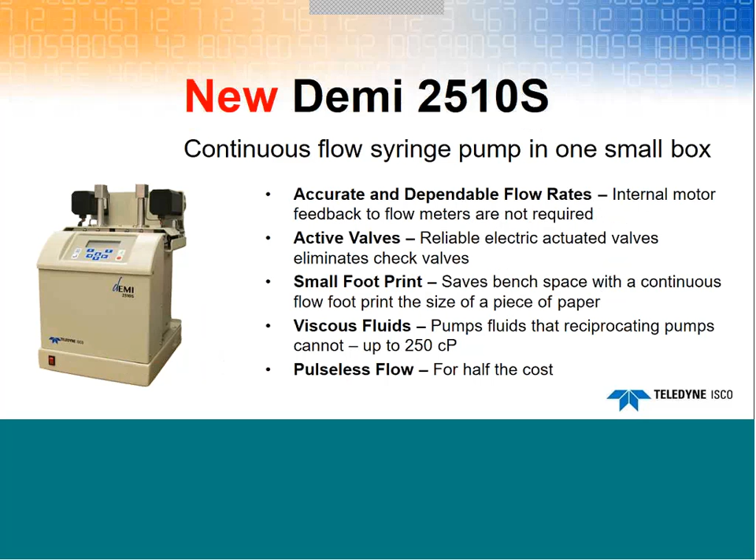The new Demi is a dual piston syringe pump that provides continuous flow in one small box. Its features include an internal motor to give accurate and dependable flow rates without the need for a flow meter, reliable electric actuated valves which eliminate troublesome check valves, a footprint slightly larger than a piece of paper to save bench space, the capability to handle viscous fluids up to 250 centipoise, which is something that a reciprocating pump can't do, and provides pulseless flow for half the cost of other systems.

Chemical reactant feed applications can consist of batch reactors or flow-through reactors, including microreactors. There are many types of pumps used for reactions, but the Teledyne Isco syringe pump, such as the D-series syringe pump, the ReaXus, and now the Demi, are particularly suited for these applications.

The D-series delivers high flow rate accuracies of plus or minus 0.5% for long periods of time, while the Demi provides similar performance at plus or minus 1% accuracy. The ReaXus has many features unavailable in other reciprocating pumps of its class, such as constant pressure, and has a flow rate accuracy of plus or minus 2%.

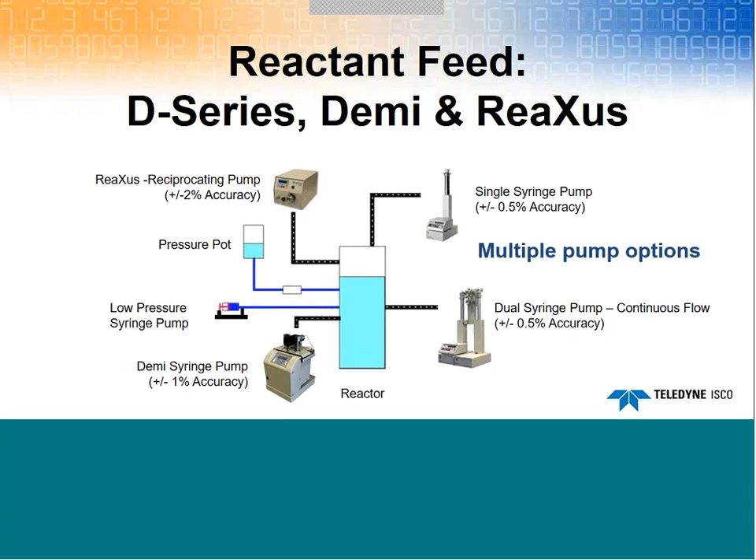Core flooding applications usually consist of a continuous flow system to deliver fluid through a core and a pump operating at constant pressure to provide the overburden or confining pressure. The Demi, combined with the ReaXus, is particularly suited for core flooding training in academic institutions as it provides a low-cost setup. The constant pressure mode of the ReaXus allows for its use to provide the confining pressure while the Demi flows continuously through the core.

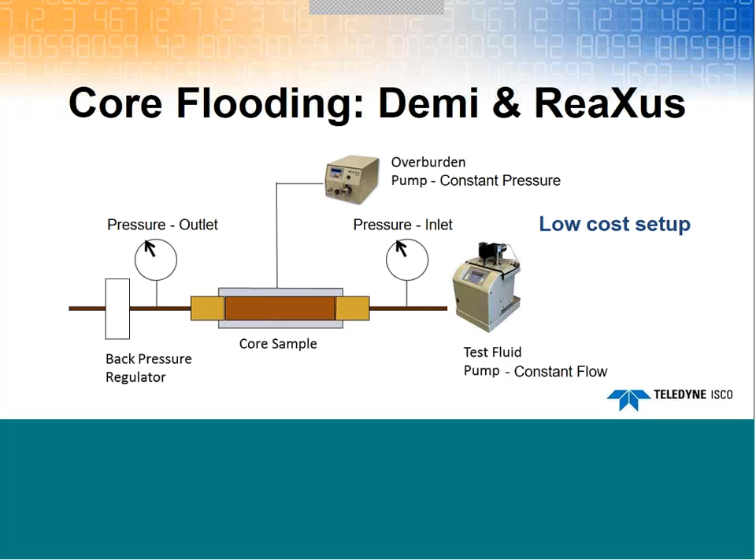Today's presentation will include a discussion on basic specifications - what can it do; setup - how to set up the system and what's required; operation - how to operate the pump and navigate the user interface; external control - what are the options for controlling the pump by external computer; and finally maintenance - how to perform basic maintenance.

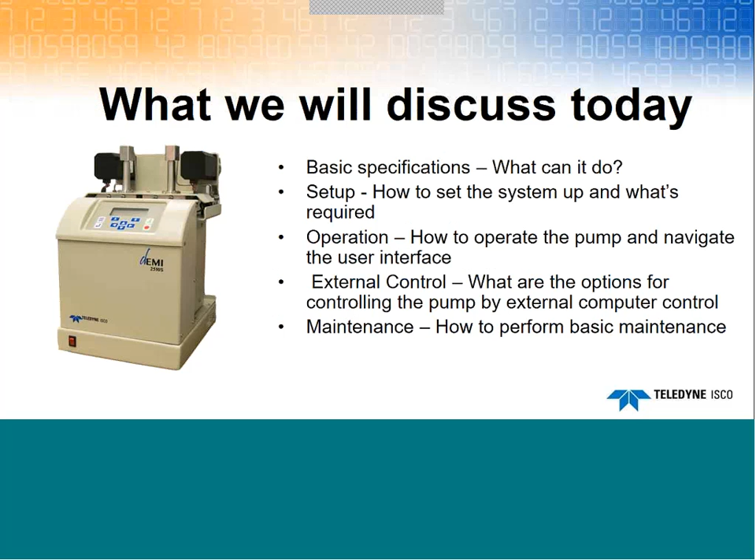The Demi is a pump family name, and the 2510S is the model name. 25 stands for 2,500 psi nominal pressure, 10 stands for 10 mils a minute maximum flow rate, and S stands for syringe pump.

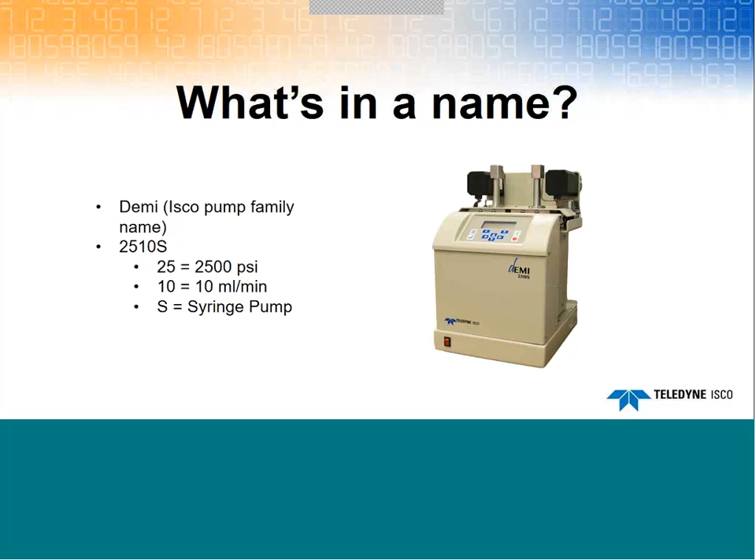The basic specifications are 180 bar pressure, or approximately 2,500 psi. The flow rate ranges from 0.01 to 10 mils a minute, and the flow rate accuracy is plus or minus 1%, ranging from 0.2 to 10 mils a minute. Fluid viscosities up to 250 centipoise can be used. The port sizes for the inlet and outlet are set up for 1/8 inch tubing. The wetted materials are nitronic 50, stainless steel 316, Haynes 214, Hastelloy, PEEK, and Teflon.

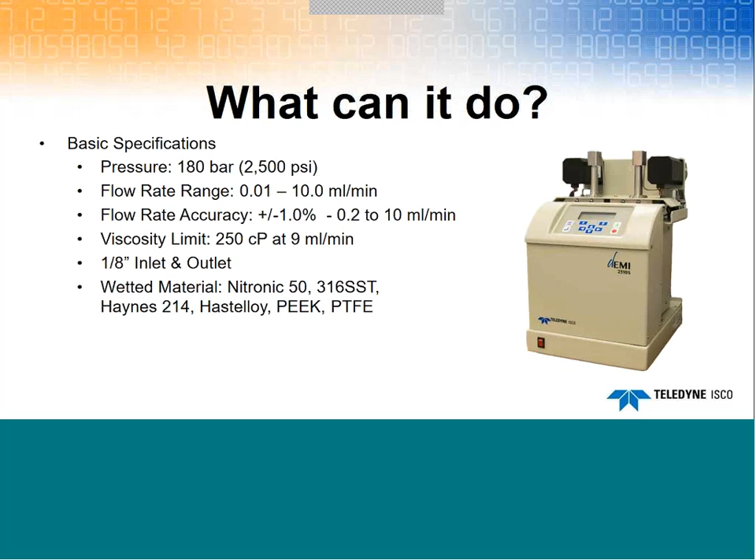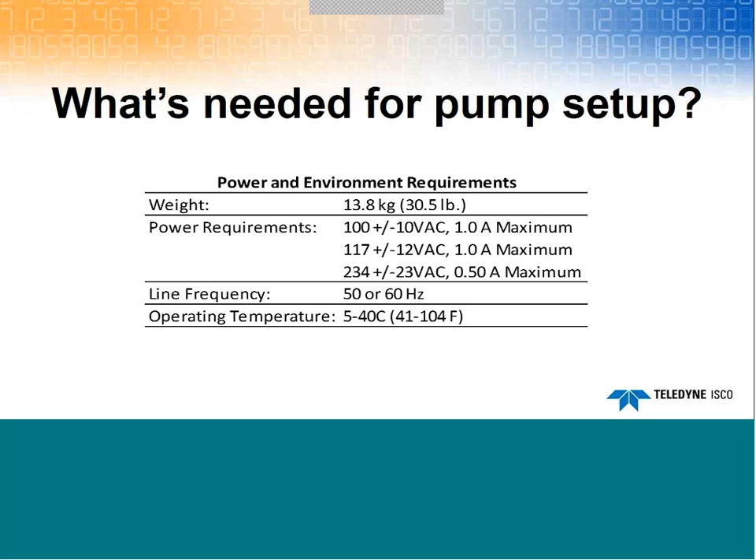The pump weighs 13.8 kilograms or 30.5 pounds, so transporting is no problem. The power can be 100 volt, 117 volt, or 234 volt at 50-60 hertz with only a change in the line cord required for the proper connector. No wiring changes are required for the different voltages. The pump as a whole can operate from 5 to 40 degrees C, which is similar to the D-series pump.

The all-in-one package makes transporting and setup easy. Grip the pump using the handles located on each side for proper handling, but be sure to take the proper precautions and follow the guidelines for lifting 14 kilograms or 30 pounds.

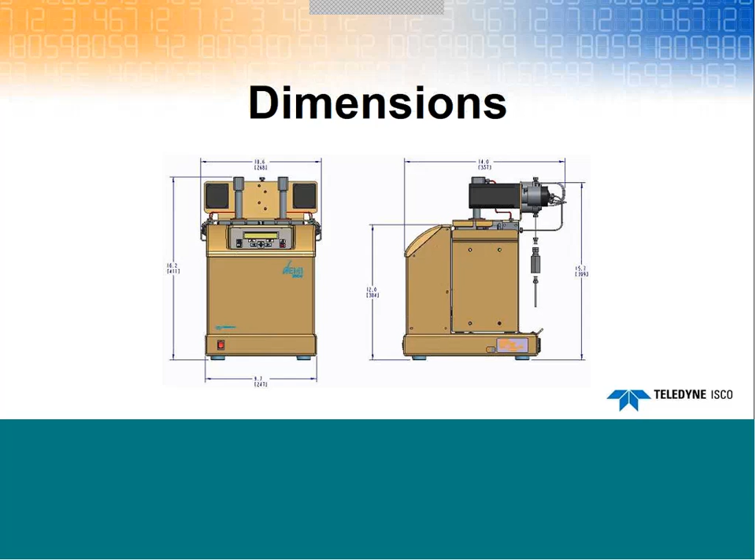The Demi footprint is 9.7 inches or 24.7 centimeters wide by 14.0 inches or 35.7 centimeters deep. Height is just 16.2 inches or 41.1 centimeters. The small footprint means that the Demi can be placed just about anywhere, taking up minimal bench space.

Powering up the Demi just requires installing the detachable line cord as seen here. When doing so, be sure the red power switch located on the front panel is turned off.

The inlet and outlet connections are located at the back of the unit, with the outlet port on top and the lower port as the inlet. Fluid connections use 1/8 inch Valco fittings for 1/8 inch tubing.

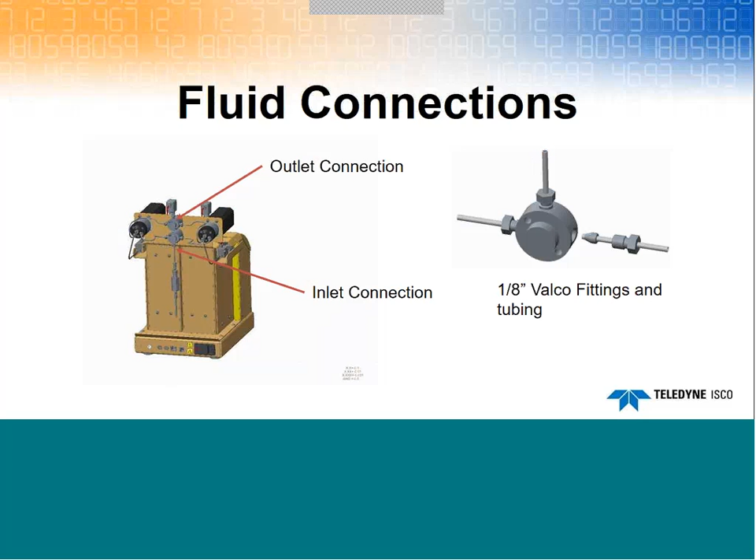The accessory package includes an inlet line complete with filter and Teflon tubing that is installed in the lower inlet port. If all stainless steel tubing is preferred, then just replace the Teflon tubing up to the inline filter with stainless steel tubing.

Your setup is now complete and almost ready to go. Just turn on the red power switch located on the lower left-hand side to boot up the system, and the valves will automatically find their home positions.

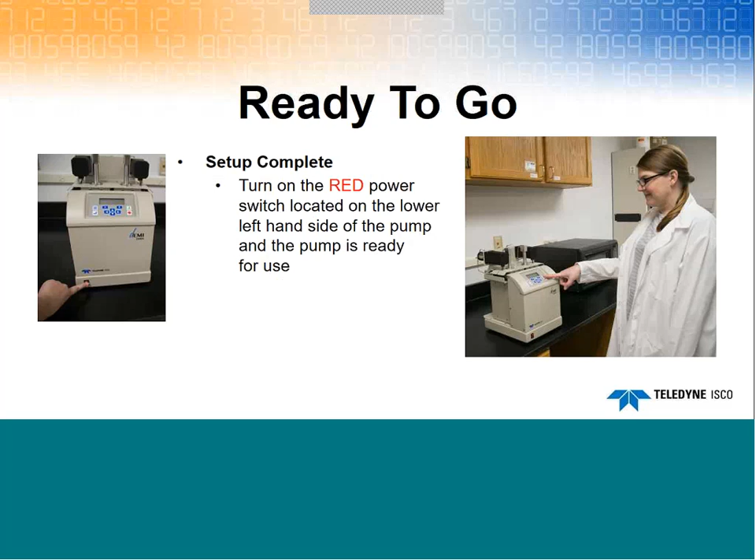The user interface is located on an easy-to-view sloped front panel. I'll describe the key functions starting from the upper left-hand corner of the keypad. Pressing the menu key will access the menu for setup functions.

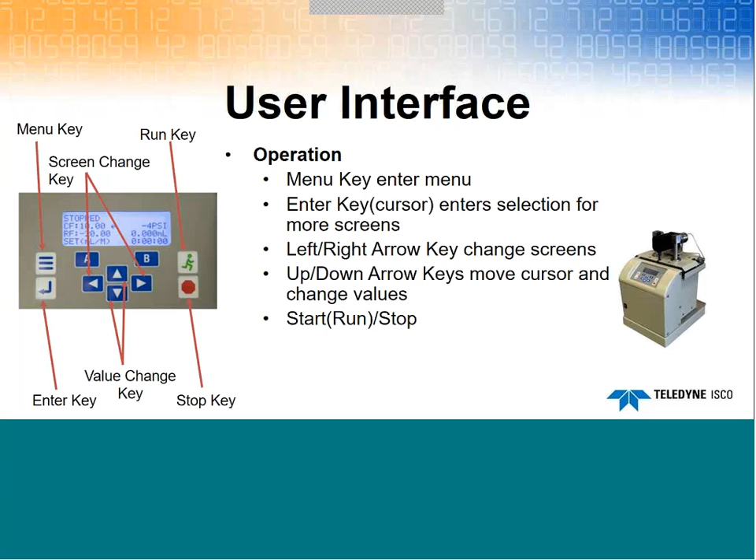Below the menu key is the Enter key, which enters the selection you have made. Next are the left and right arrow keys used for screen changes. The up and down arrow keys move the cursor and change values. Last are the run and stop keys, with the run key shown in green and the stop key in red.

After booting up, the display is backlit and shows the basic operating functions. Starting from the upper left-hand corner and moving down in the first column, the first is the pump status, which shows stopped in this example. Below is the flow rate, which is settable and shown here as 5 mils a minute, which can be set anywhere from 0.1 to 10 mils a minute. CF stands for constant flow mode.

Next is the refill mode, which can be set as high as 20 mils a minute. Under the refill rate are the units, which are user selectable; in this case it shows mils per minute.

Now starting at the top of the right-hand column shows the volume remaining of the cylinder that is currently in operation. Below that is the actual pressure reading, followed by the total run volume. And last is the elapsed time from when the run has started.

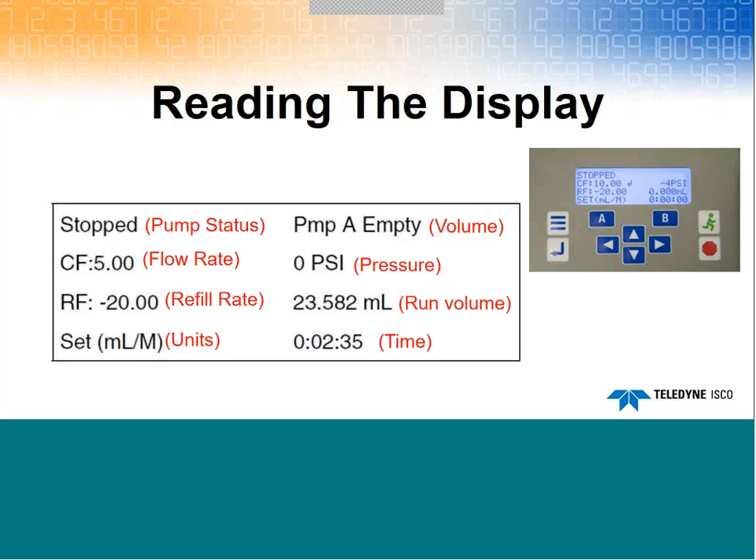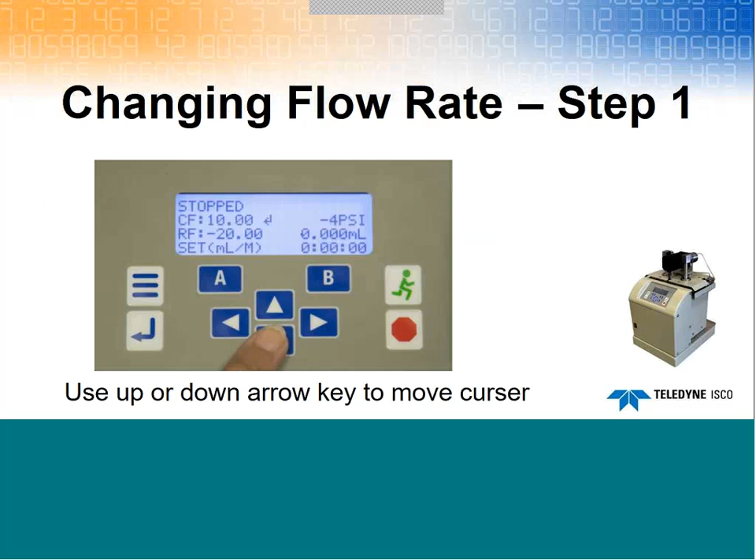Changing the flow rate is easy. Just use the up or down arrow key to locate the cursor next to the CF, or constant flow status, as shown in the picture.

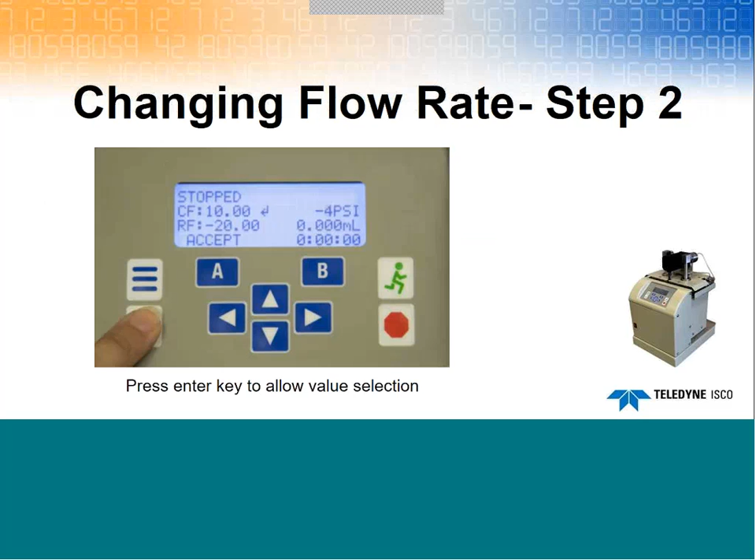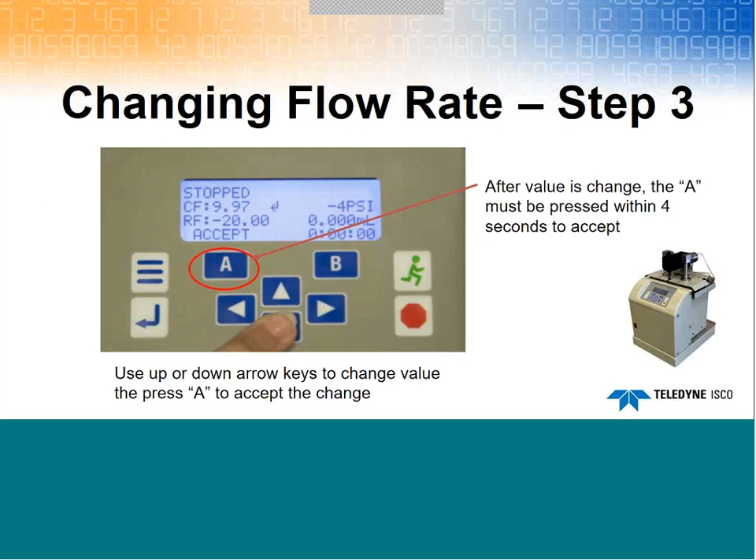Next, press the Enter key as shown. Now use the up or down arrow key to change the value. After reaching the preferred value, press A to enter or accept. The flow rate is now changed.

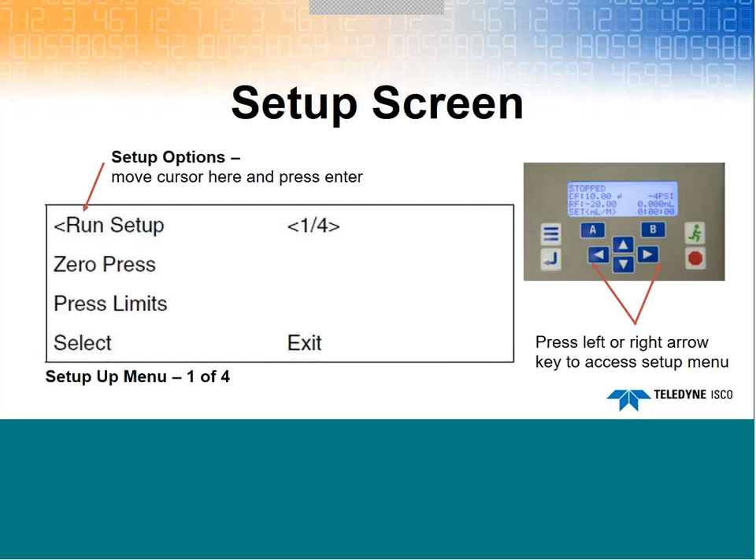To access the setup screen, press the menu key, then use either the left or right arrow key. Scroll until you reach page 1 of 4. When first entering the setup screen, you should already be on page 1. Move the cursor next to Run Setup and press Enter.

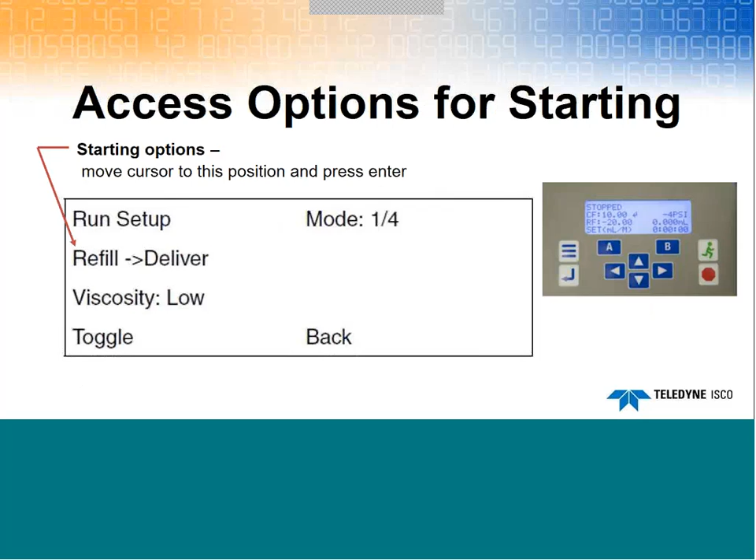To locate the starting options, use the up or down arrow key to move the cursor to the refill deliver position. There are 4 setup options for starting the pump: refill and deliver, empty, refill then deliver, refill only, or empty only. Press key A to toggle to reach the startup option you prefer, then press the B key to return to the previous screen.

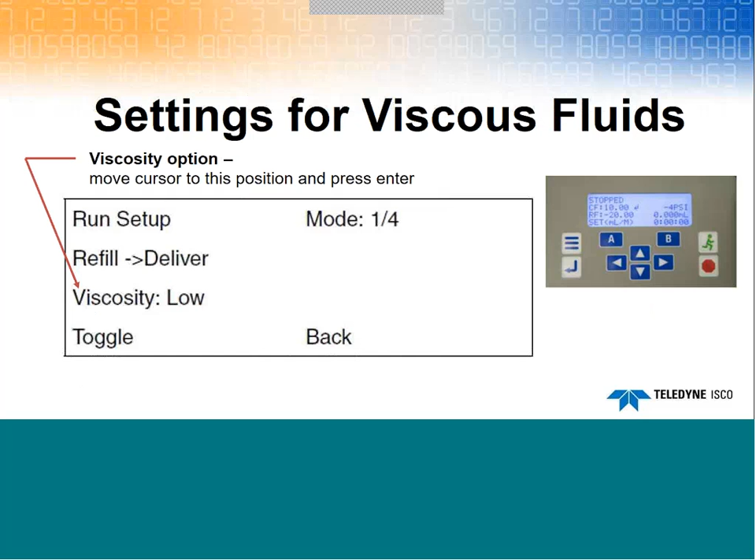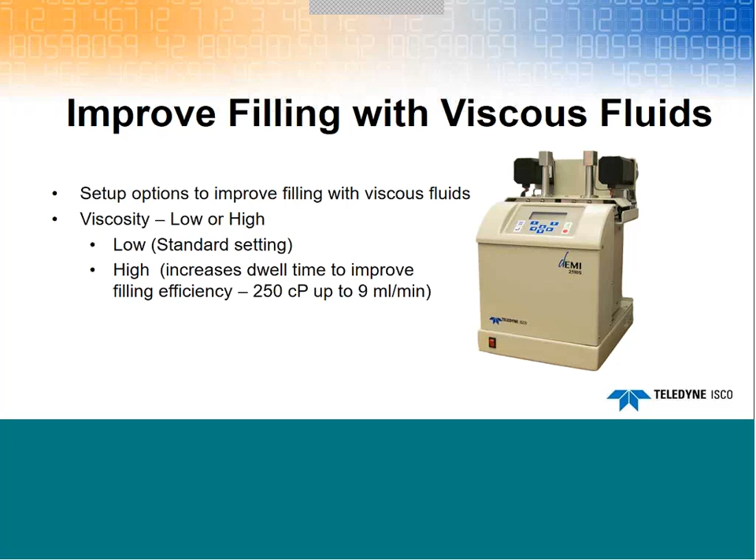Going back to the setup screen, scroll to and enter viscosity. There are 2 options for viscous flow: low and high. Use the A key again to toggle to your selection and return to the previous screen. To improve filling efficiency of viscous fluid, change the setting to high. The high setting increases the dwell time, or the time the piston will remain after refilling with the inlet valve open. This increased refill time will allow fluids up to 250 centipoise to be used.

When choosing external communication, you must select only one configuration of the 4 following options. You can either use Ethernet USB, or you can select RS-232 485. And within each of those, you can select either 0 to 10 volt or 4 to 20 milliamp for inputs and outputs.

Maintenance is easy to perform and is required in only 3 places. Lubricate the ball screw every 5,000 strokes, or replace the seals every 10,000 strokes. The rotor should be replaced about every 15,000 strokes. A stroke counter is built in for maintenance reference and is located in the diagnostics menu.

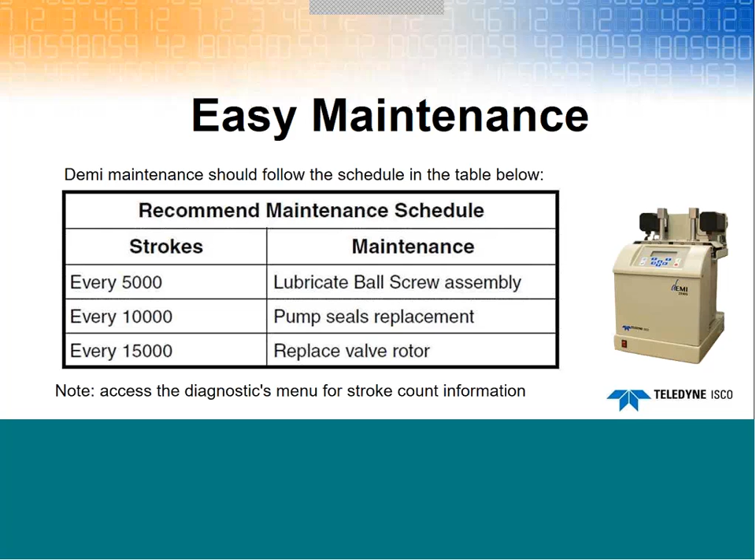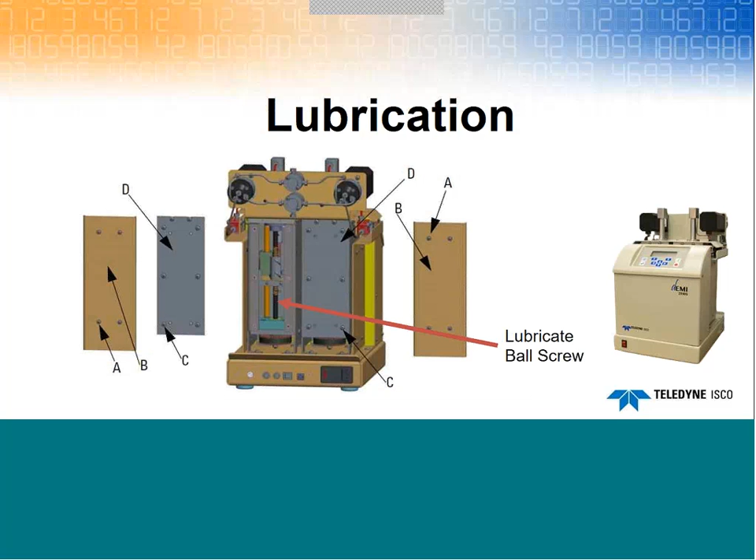Access the ball screw for lubrication by removing 2 panels, an inner and outer panel, located by each cylinder in the back of the pump. Simply add a small amount of lubricant to each side of the screw and the job is complete.

Remove the cylinders to give access to the piston, and removing the piston retainer allows for removal and replacement of the old seal. After installation, run the automated leak check diagnostics to ensure a job well done.

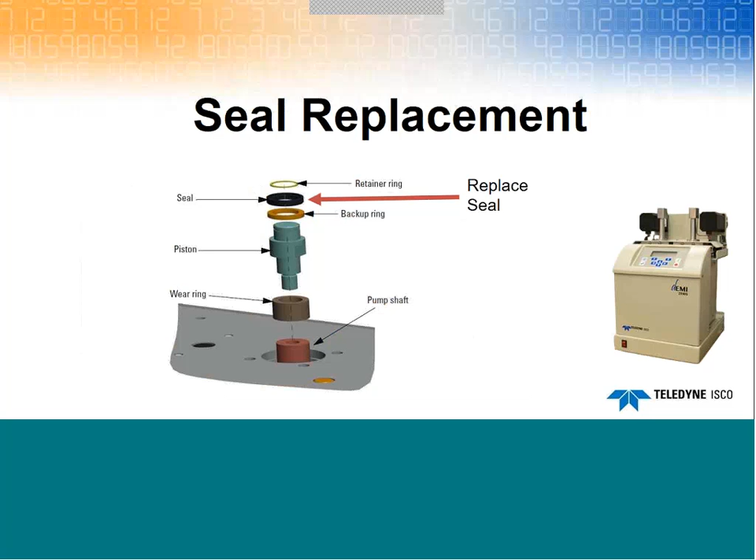Access the valve rotor by removing 3 screws from the rotor housing. The rotor is located in a pocket and can simply be pulled out. After installation, the automatic leak check will diagnose the valve as well.

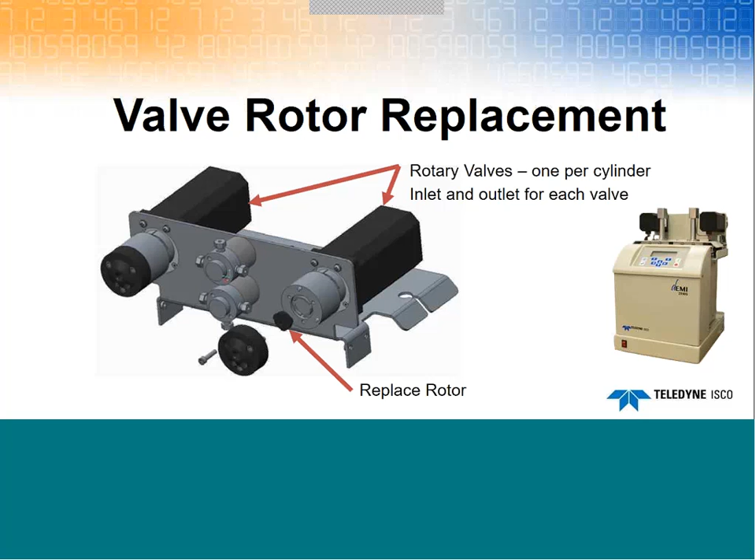In review, the Demi is compact and can be placed almost anywhere with minimal bench space. It's easy to use with quick setup and intuitive interfaces. And finally, it's cost-effective to give just the performance you need.